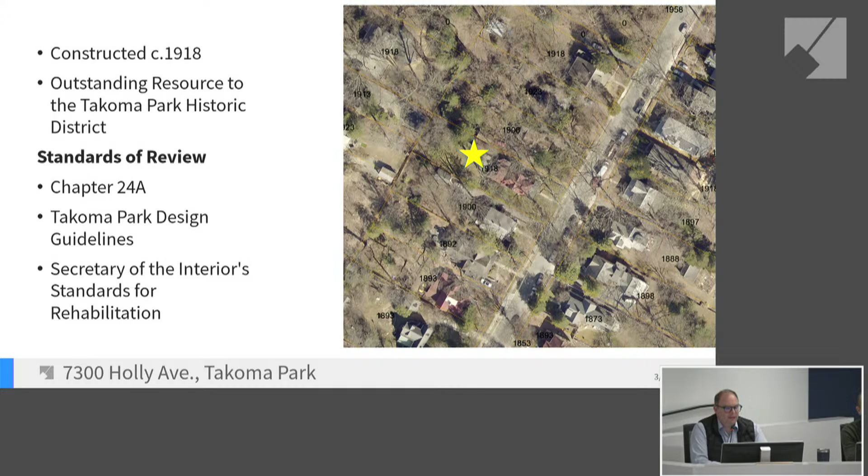So this is the staff report for the historic area work permit at 7300 Holly Avenue in Takoma Park. This is HAWP 1016595. The house was constructed circa 1918. It is designated as an outstanding resource to the Takoma Park Historic District and is to be reviewed under Chapter 24A, the Takoma Park Design Guidelines, and the Secretary of the Interior's Standards for Rehabilitation. The proposal is to construct a ground floor addition off of the left elevation, and the HPC reviewed a preliminary consultation at the January 25th Historic Preservation Commission meeting and was very supportive in their comments.

So again, just to familiarize yourself with the house, it sits high above the street. The addition is proposed for the left side here. We'll see in the plans shortly. There is a large tree to the rear that they're trying to avoid any impact on, which is why the HPC supported building off of the side. Also, there were some interior floor plan issues that made a left projecting addition more functional for the applicant's use.

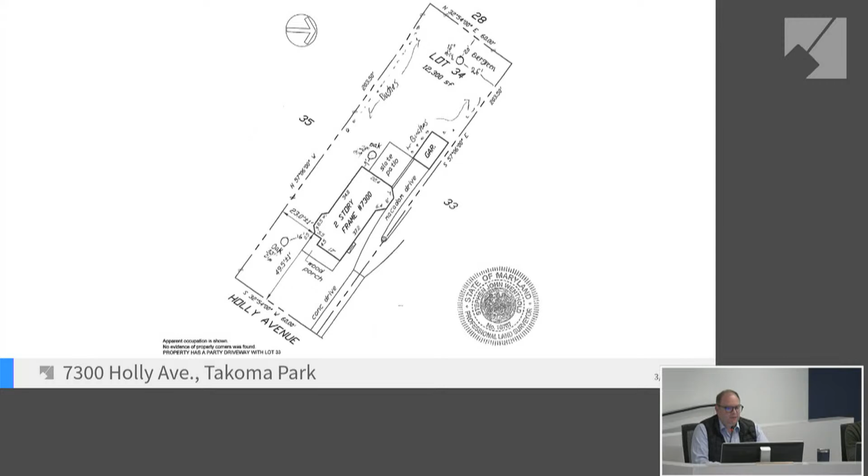So historically, the house's rear wall was along here where the cursor is. The proposal is to build the left projecting addition off of a circa 1980s addition.

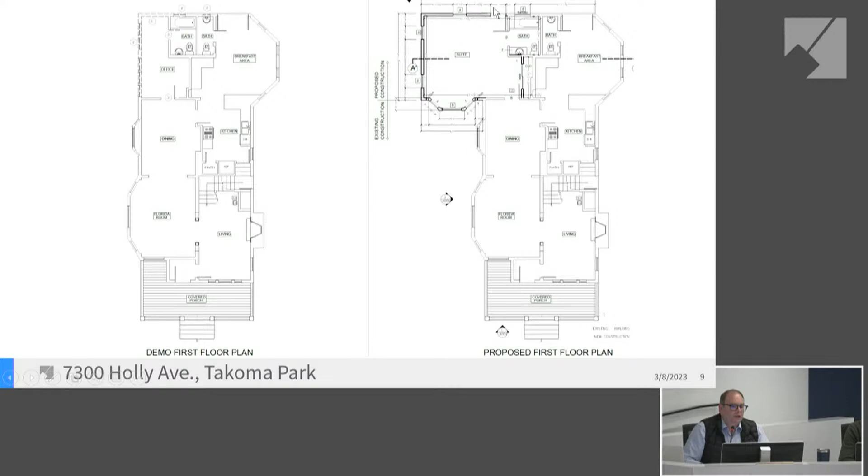The primary issue this evening is staff's recommended condition, which is that the applicant's proposed asphalt shingles not be installed, and that metal shingles matching the appearance of the existing roof configuration be approved instead.

So staff finds that as an outstanding resource, it's permissible to make sympathetic alterations, changes, and additions. Again, just to reiterate, the HPC supported the size, scale, massing, and placement of the proposed addition at the January 25th, 2023 preliminary consultation. Staff finds that the added front bay is in keeping with the recommendations voiced by several of the commissioners at the preliminary consultation.

Staff finds that the materials proposed are appropriate for additions and infill construction, both to outstanding and contributing resources in the Takoma Park Historic District, with one exception. Staff finds that both asphalt shingles and standing seam metals are inconsistent with the historically appropriate metal shingles, which would match the dimensions and appearance of the historic roof.

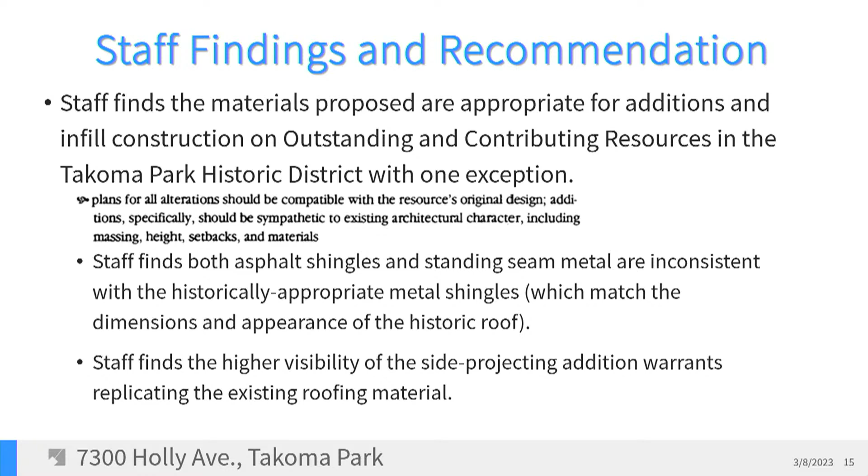Reading from the guidelines for outstanding resources, it states that plans for alterations should be compatible with the resource's original design. Additions specifically should be sympathetic to existing architectural character, including massing, height, setbacks, and materials. Staff finds that the higher visibility of the side projecting addition warrants replicating the existing roof material exactly, which can be accomplished using contemporary materials.

So staff recommends that the HPC approve the HAWP under 24A8B2 and 5 and the Takoma Park Historic District Design Guidelines, with the added condition in the staff report that the addition's roof needs to match the metal shingles of the existing house. And I will answer any questions at this time.

Do any commissioners have questions for staff?

Commissioner Pelletier: Thanks. Does that rule apply to an addition to a non-historic addition, as far as matching the materials of the original house?

So that guideline is specific to outstanding resources. In the Takoma Park District, they categorize resources as either outstanding, contributing, or non-contributing.

While most of the focus is on outstanding resources and applying the Secretary of the Interior standards for rehabilitation, there are several other bullet points, including this one. So that's where staff pulled that from, directly out of the guidance for outstanding resources, which is how this property is categorized.

Okay, thanks. And I just want to add, Commissioners, the applicant did submit some testimony that was distributed in the board books, which you should all have had the opportunity to review prior to the hearing.

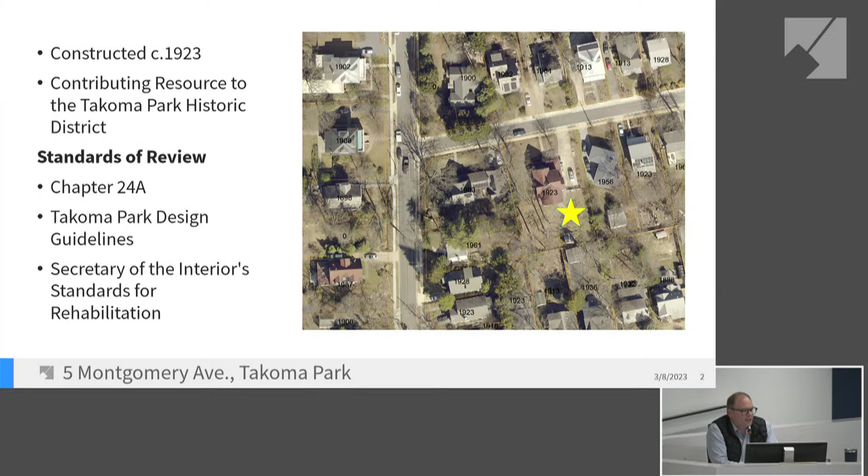Good evening. This is the preliminary consultation for 2B at 5 Montgomery Avenue in Takoma Park, the building you see in front of you. It was constructed in 1923 as a contributing resource to the Takoma Park Historic District. This is reviewed under Chapter 24A, the Takoma Park Design Guidelines, and the Secretary of the Interior Standards for Rehabilitation. The applicant proposes several changes to the existing building, including removing and replacing the existing siding and trim, constructing an addition at the rear, replacing the existing roof, and changing the fenestration at the rear and side of the historic building. This is the subject property, just to familiarize yourselves again.

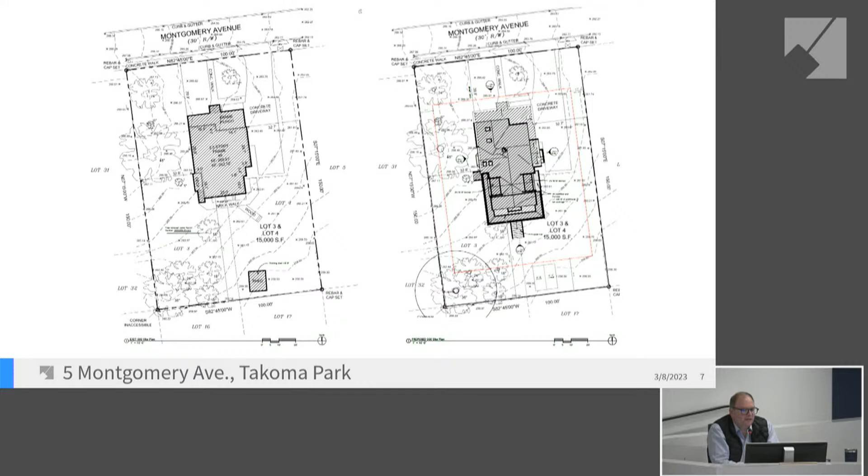We don't actually know when the siding was covered, but much of the trim was also removed when the current siding went on. From the rear, the addition is not adding a whole lot of space - it's only adding 8 feet of depth to the house. There is a wraparound porch that will be constructed as part of that. However, much of this is inset from the historic wall planes and set a significant distance from the right-of-way.

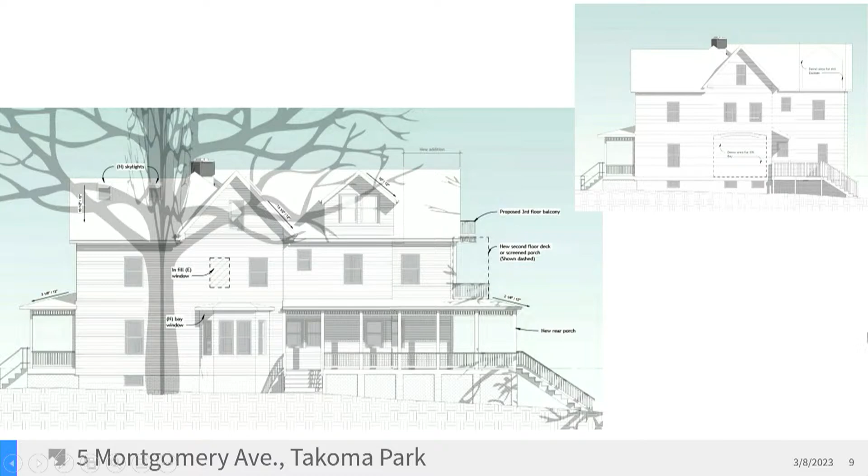And the rear elevation again matches the full width of the existing house, including a balcony on the 3rd floor.

Staff finds that the house has been substantially modified over time, including modifications necessary for it to be used as an apartment. Advertisements from the 1940s for renting it were found, and in the 1959 Sanborn map, it was also labeled as an apartment.

The condition of the historic siding, if it's still extant, is unknown. Staff finds that the size and placement of the proposed addition will not overwhelm the character of the house or surrounding district. A coplanar addition is likely acceptable because the rear section of the house is already inset by several feet and has been modified, per comparison between the existing condition and both Sanborn maps. Staff finds the proposed rear porch, with its compatible materials and design, will not negatively impact the historic character of the house or surrounding district.

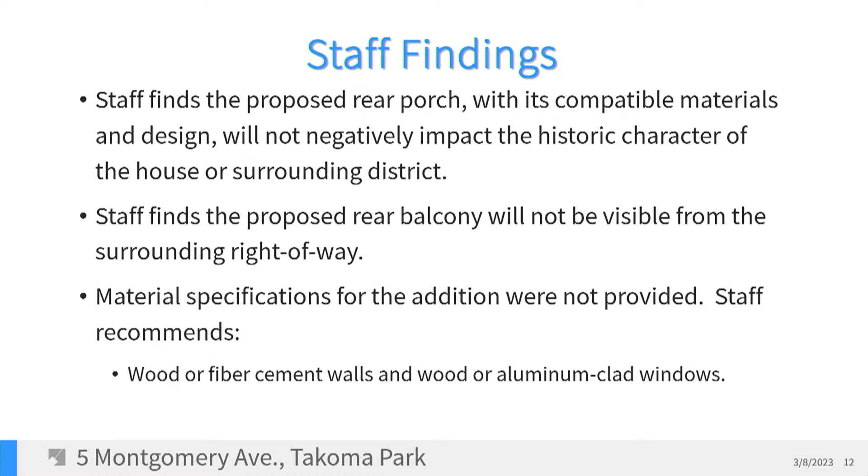Staff finds that the proposed rear balcony will not be visible from the surrounding right-of-way and should be approved as a matter of course. Material specifications for the addition were not provided, and staff recommends that either wood or fiber cement walls and wood or aluminum-clad wood windows would be appropriate.

Staff also finds that the proposed dormers will not have a significant impact on the character of the house because their visibility from the right-of-way will be relatively minimal. Replacing the asphalt shingle roof with a new asphalt shingle roof is acceptable and would be an in-kind replacement.

The application materials also indicated that a metal roof was also a possibility. Without a material specification for the metal roof, staff cannot make a recommendation. Staff finds that the proposed bay window is generally consistent with the design and character of the house.

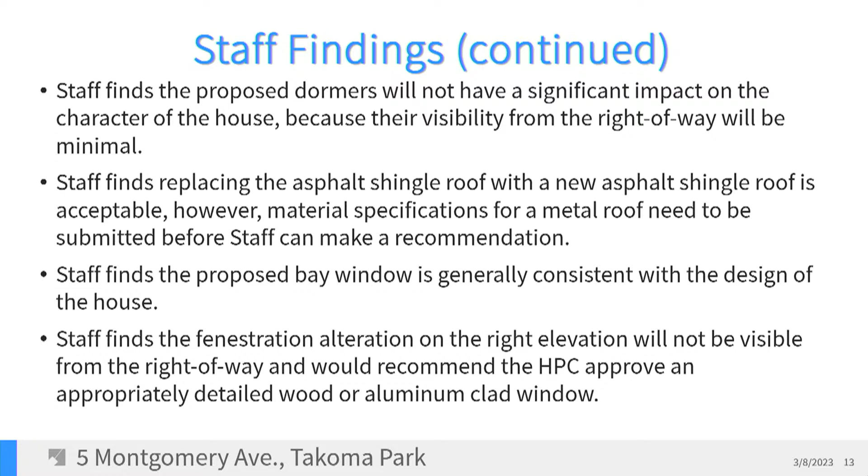Staff finds that the fenestration alteration at the right elevation would not be visible from the right-of-way and would recommend that the HPC approve an appropriately detailed wood or aluminum-clad window. I did not point that out in the elevations, but we can go back to those changes if you'd like.

Staff finds that the skylights proposed for the right-facing gable are appropriate. However, the skylights on the right slope of the front-facing gable—which has many different roof slopes and forms—contravene the design guidelines in Standard 2 and should be revised or eliminated from the scope of work.

Staff does not support removing the second floor window above the new bay window on the right elevation, because its removal would alter the proportions on what is a highly visible elevation.

Staff requests HPC feedback on several elements, including the appropriateness of a coplanar addition, the impact the proposed dormers would have on the character of the house and surrounding district, the appropriateness of the right side bay window, staff's recommendation for the skylights on the front gable, staff's recommendation to retain the second story side window, and guidance on the evaluation and documentation necessary to remove and replace the existing siding. With that, I will answer any questions you have.

Are there any questions for staff? Commissioner Haynes: On the Sanborn maps you provided in the report, they look identical. Are they different, other than it looks like maybe the shed was removed in 1959, but the footprint appears identical, is that right? That's what Sanborn provided us when we bought those maps, so it appears that way, yes.

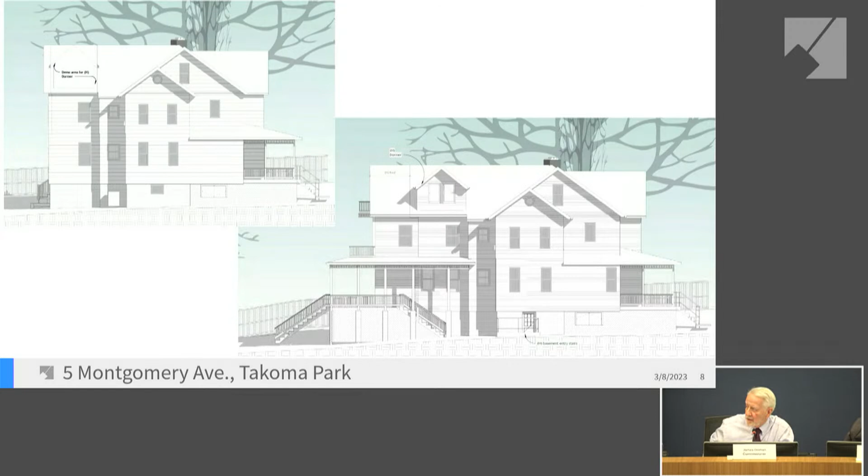Now, I have a question about the elevation drawings. Is the addition actually taller than the gable on the front of the house? If I look at this correctly, it looks like the ridge of the new gable is actually higher than the ridge of the existing front gable. Is that true? Well, no, it only continues the existing ridge height.

So it looks higher for some reason. This portion of the gable, that's what I'm talking about, is taller than this front gable.

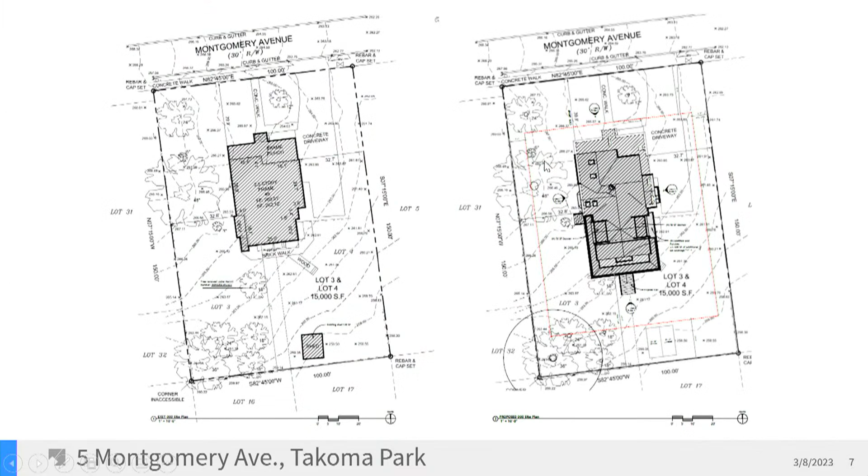Also, if you look at the rear, you see that this gable is centered. And I didn't bring the front elevations because there's no visible change, but you can see that this front gable is offset. So yes, you can't see the house in elevation, but yes, this roof, the way it's drawn, is taller. This rear gable is taller than the front gable.

But in the addition, that's existing, isn't it? It's existing. That's existing. And right now, in the addition, these 8 additional feet just continue that ridge line. Okay, I understand. I thought the whole thing was being raised, but it is currently higher right now. Correct. Okay, thank you.

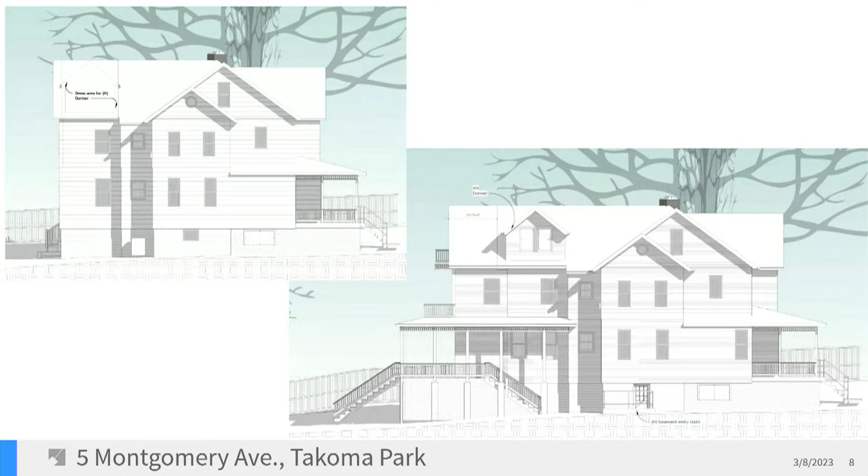Commissioner Pelletier. Thank you. As far as the original siding goes, I only asked this because I just went through this exercise at my house, and you can't really tell by pulling off a few feet of the asbestos the condition of the whole house. In the case of my house, some of it was in awesome shape, and then some of it was just a mess. So how do you evaluate that in the process?

Well, the applicant is proposing to install new siding over it. So in some instances, identifying what the condition of the historic siding would be could guide the HPC's decision-making process and what would be an appropriate replacement siding, because the drawings don't provide us with a specific reveal or profile that may allow for that.

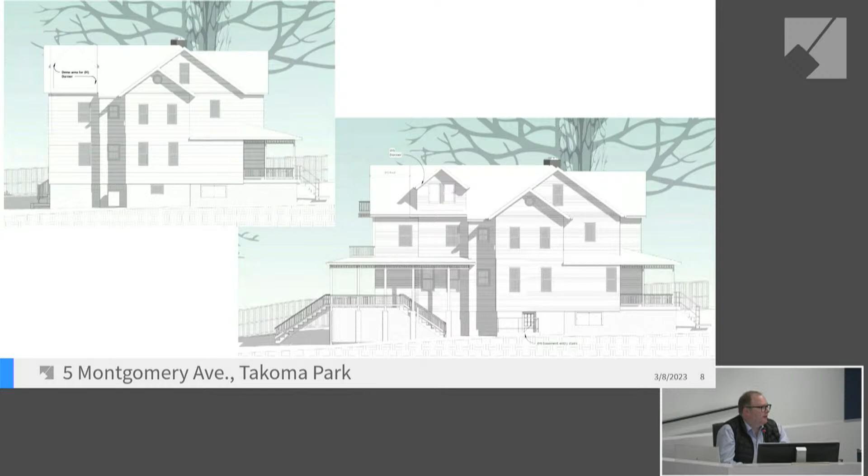Additionally, if we understand the material and configuration of the historic siding and the applicant were to match that, they would be eligible for county historic preservation tax credits. So understanding the material would also help guide that decision where there are financial incentives potentially available to them for doing that.

Okay, I was just looking at the photos. It's hard to tell, but it looks like the face of the trim is kind of coplanar with the face of the asbestos. Yes, it's an incredibly flat profile, which would imply that there's siding under there, and that they put the asbestos over the top. Okay, so it's kind of a process to figure out whether they're going to restore what's underneath.

So if it turns out that some of it is not in good shape and some of it is, is the option to restore, replace all that's rotten, keep the good stuff and replace the rotten stuff to match, or would they be required to take off all the old siding to put up the new siding?

Well, some of that's what they propose to do at the HAWP. It's dependent on that. If what is revealed is in decent condition, the typical requirement is that they repair what they can, and if it's deteriorated beyond repair, then it's replaced in kind and matching.

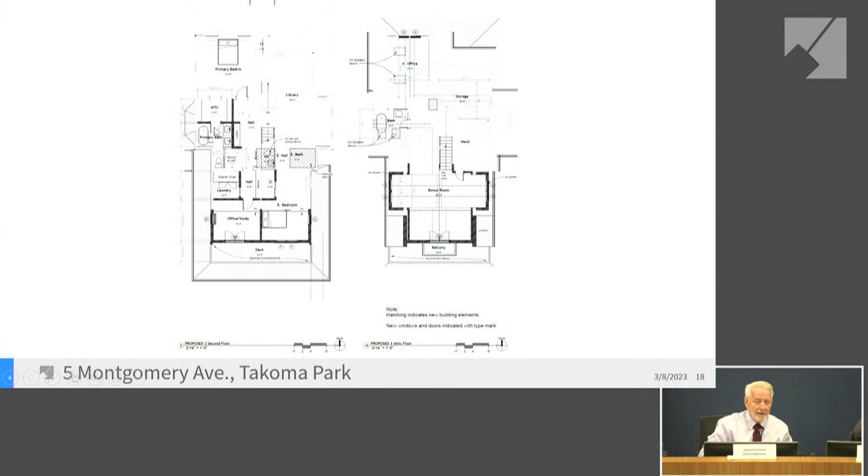So I think a lot of these changes came with those configurations. We've maintained that apartment the whole time we've been there, up until now. So it looks like in the proposed drawings this second floor apartment will be done away with, is that correct? That's correct. It would no longer meet the requirements of a rental unit, I don't believe.

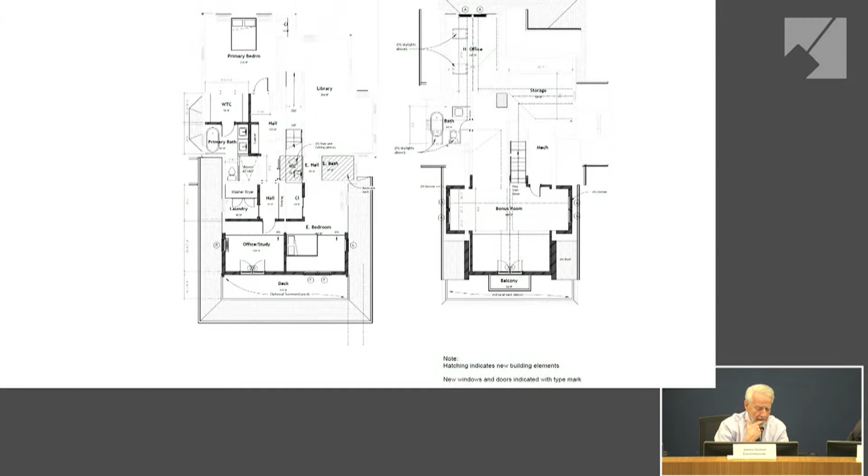One of the photographs shows what looks like an elevator chairlift on the side of the house. That was for my father. He was unable to walk for the last part of his life.

Do you have intentions to make this more ADA compliant throughout? We're getting rid of that chairlift and restoring the porch. The interior of the house, particularly the ground floor, we are hoping to make much more accessible. It's an old house that's already been chopped up once, so it's got teeny tiny hallways, and my father had a prolonged illness before he passed, and it was very difficult to manage given the interior of the house. Okay, that's all, thank you.

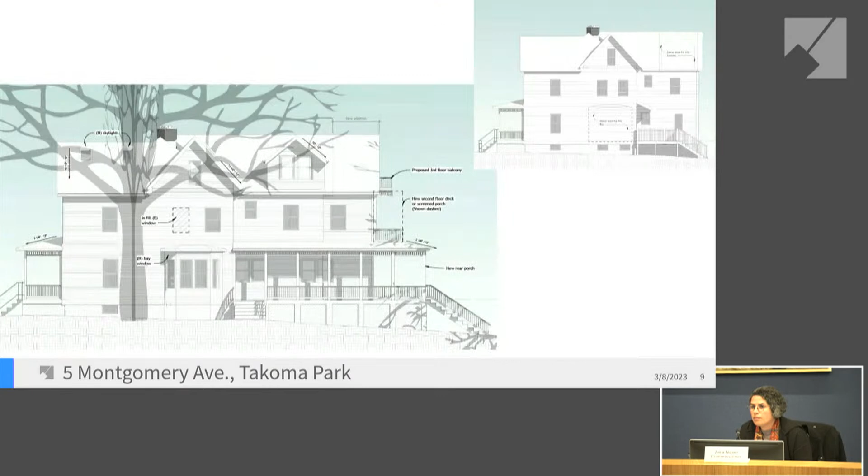Commissioner Nasser: my question is about the skylights. I see that the room already has 2 windows, is there a reason you want to add those skylights? That portion of the house faces north and is relatively shaded, so those front windows don't really bring in a whole lot of light. That was our architect's way of trying to figure out how to make that less of a small, dark room up there. Thank you.

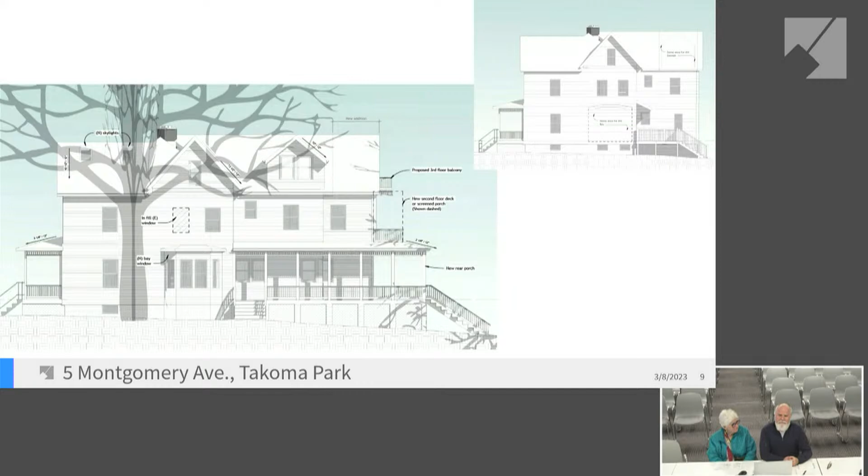We appreciated staff's feedback on that particular point. I don't know if there's time for homeowner questions? You can talk about anything you want, including questions. We are novices to the world of skylights, although we do love natural light. If there were thoughts or recommendations on how to make those a lower profile, or anything that would make it more acceptable, we'd definitely be interested in hearing about that.

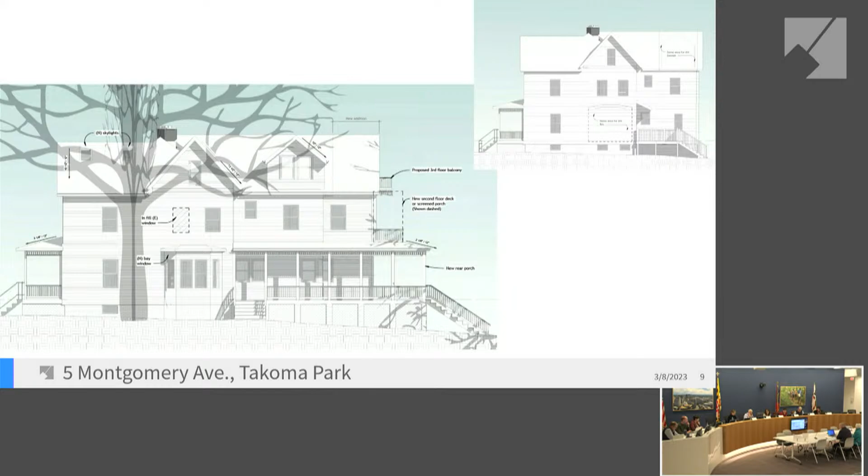I think you've got enough people on the HPC who can definitely give you an opinion, and actually learned opinions too, by the way. If there are no more questions, we can begin our discussion about this. Would somebody like to go first? Commissioner Haynes? Thank you.

Well, first of all, I appreciate that you've lived in this house for over 40 years and wish to continue to make it livable for your family and keep it in the family, so I applaud that. With regard to staff's question of the addition being coplanar with the existing house, I think that is fine. I think the offsets that are there currently allow one to understand the historic portion of the house, and I think in this case that a coplanar wall situation is fine.

With regard to the dormers, I understand the need to want to use the space on that attic level. I feel they're a little bit large relative to the massing of the rest of the house, particularly the cross gable. I noticed you used a shallower pitch for the dormer, and I might suggest you keep the pitch of the cross gable, which will help break down the dormer massing and be a better proportion. I don't mind the double windows in the dormer, but if they were single windows, it would be more in keeping with the single windows of the main house gables.